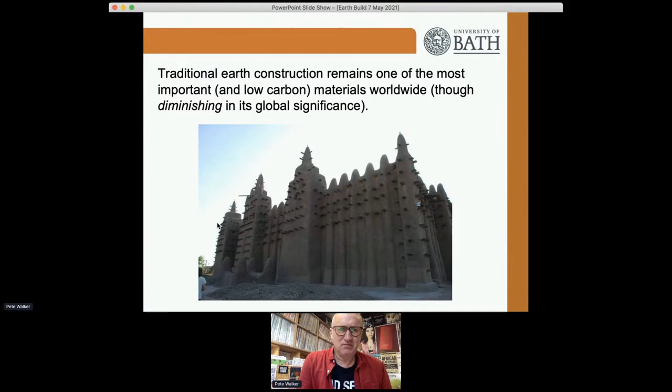So just to state some of the global problem, and I'm sure many of you know this, the built environment is the largest contributor to our global carbon emissions. The way we build buildings and the wider environment, and the way we use buildings, contributes to, in many industrialized countries, around 40% of our total energy use.

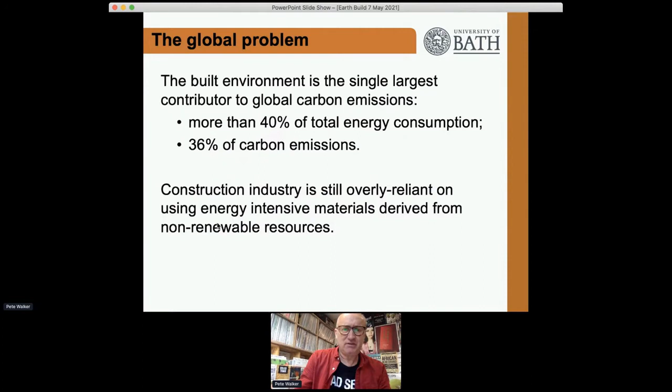And similarly, depending on how we generate the electricity and other energy, around 36% of our CO2 or greenhouse gas emissions. And still we rely on a construction industry that's over-reliant on highly energy-intensive, cheap fossil fuel energy materials derived from non-renewable resources.

And just to talk about materials use, the construction industry globally consumes around 40% of all raw materials that we excavate, grow and harvest from the earth, which is about 3 billion tons of materials a year. And the manufacture of materials we use to build our infrastructure accounts for around 11% of all greenhouse gas emissions.

Some statistics specific to the UK, where I'm speaking from: around 120 million tons of waste is produced as well. So not only does the construction industry use a great deal of resources, it also produces a lot of waste in the process.

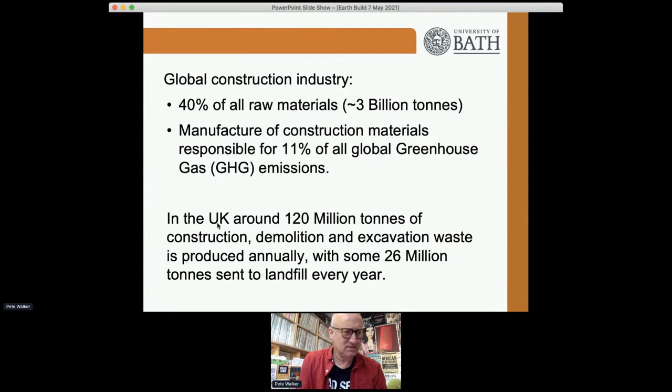Just for context, the second most consumed material on the planet after water consumed by humans is concrete - we consume a huge amount of that material. And the production of cement that goes into concrete is a large contributor to CO2 emissions.

We talk more recently about needing to decarbonize our economy, and there are international agreements to decarbonize economies and get them to net zero carbon by 2050. If we're going to do that, then in the construction industry as well as elsewhere, we need to improve our manufacturing and improve the functionality of our buildings.

Both new build and our great enormous stock of existing buildings. This revolves around improving energy efficiency and operation of buildings, using lower carbon materials, and also greater circularity in our processing - designing not for cradle to grave, but for cradle to cradle, with a view to how we use materials and products after the end of life of a building.

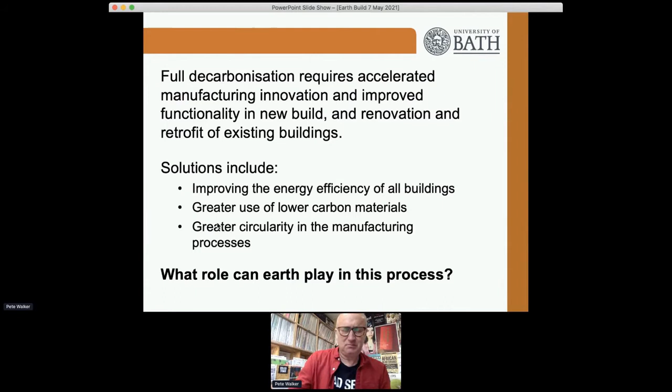So what role can earth building materials play in this process? I've been working on earth construction for around 30 years now, and over that period I've seen a variety of innovations in earth construction.

First of all, in terms of a greater array of products - manufactured products such as plaster products and building boards, and even pre-mixed, pre-bagged rammed earth, as well as a variety of unfired masonry units, as shown in the figure.

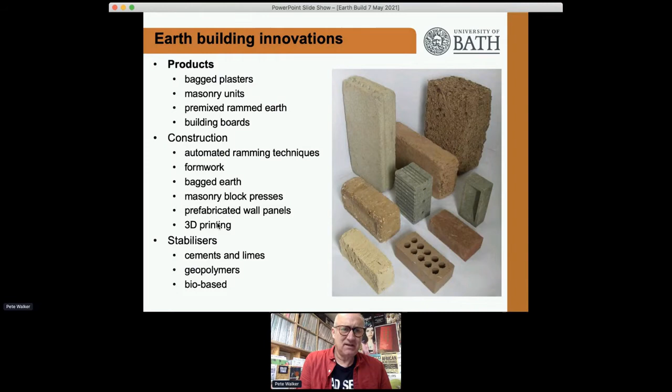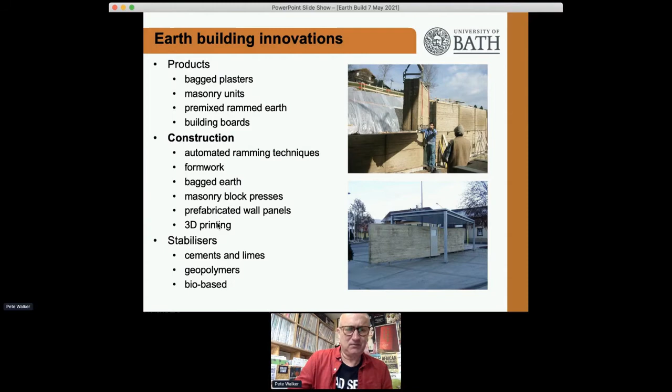And then in construction processes with earth, we've seen prefabricated wall panels, as the examples in the photographs show, both from Martin Rauch, and also automated ramming processes, innovative formwork, bagged earth, and different presses to make masonry blocks. Most recently, 3D printing has been used to produce earthen buildings, and very recently there was a release about a building in northern Italy, which looks quite stunning.

And of course, a contentious issue at the bottom here is a recognition that for many people around the world, earth construction means stabilized earth construction. We can talk about this till the cows come home and beyond. But there has been a lot of work done on looking at how to improve some aspects of the performance of earth building. Indeed, some of the natural processes we use in earth, whether it's compaction or mixing with natural materials such as cow dung, is a form of stabilization as well.

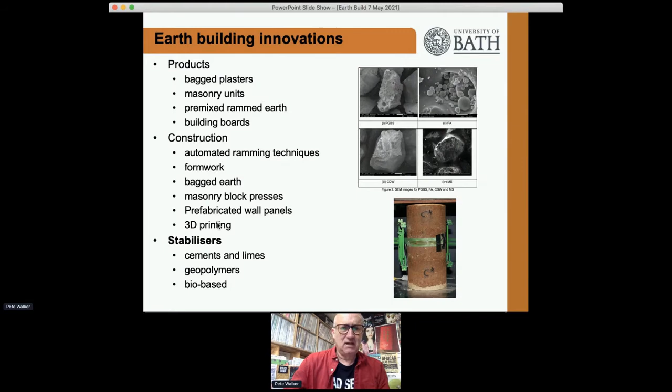In recent years, we've seen a lot of research effort and innovation by industry, and knowledge generated to understand truly the performance of earth building and the benefits it brings. One of the speakers earlier mentioned the amount of research done on earth construction. I can probably confidently say there are more people with PhDs in rammed earth construction in the UK than there are people actually making a living out of building with rammed earth.

So we have a better understanding of hygrothermal performance of earth construction, and the positive contributions earth makes to comfort and indoor air quality and indoor environmental quality of our buildings. A better understanding of mechanical performance and structural design of earth buildings, a better understanding of durability, and linking to that, how we can best repair and conserve existing buildings.

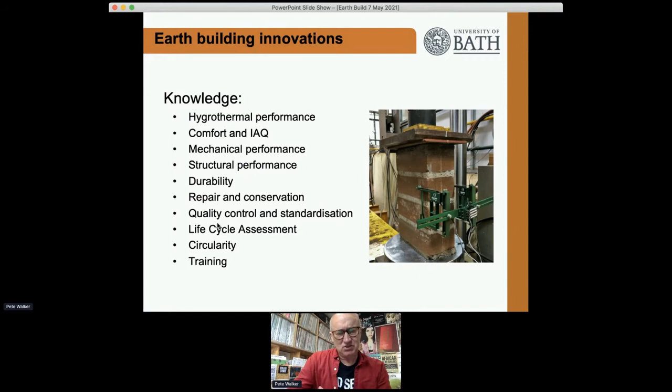This has fed into standardization, as mentioned with the New Zealand standards, and increasingly many countries around the world now have standards for earthen buildings developed over the last 20 or so years. There's also a better understanding of the environmental impacts of earth building, linking through to how we can develop that into circularity, circular construction, which has also fed into training.

In terms of understanding what earth can do to improve the impacts construction and buildings have upon climate change, it has to be done through being informed. One way, and the best way to inform that impact, is through something called life cycle assessment, through understanding the various environmental impacts that processes, materials and products can have. Then we need to use informed decision making.

We'll hear from the next speaker about environmental product declarations, EPDs, which is a particular take on life cycle assessment. Sometimes, because the impacts of a process or product can be multifaceted, often in terms of reducing greenhouse gas emissions, it can come down to the concept of just looking at embodied carbon dioxide equivalent—the amount of CO2 emitted to the atmosphere as a result of construction and product manufacture through whatever defined period, whether cradle to gate, cradle to grave, or cradle to cradle.

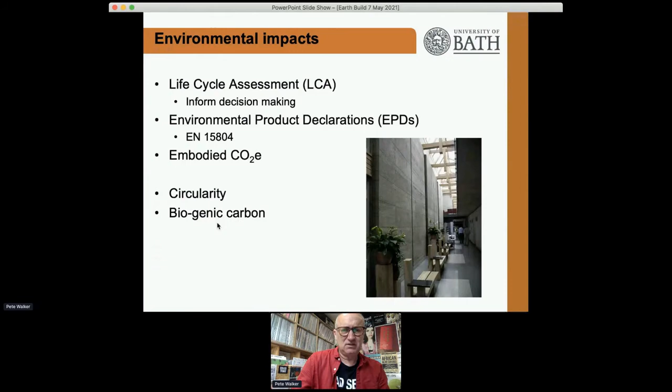And again, mentioning the aspect of circularity, more increasingly the construction industry is now aware of the positives of biogenic carbon, i.e. that plant-based materials through photosynthesis can take atmospheric carbon dioxide and turn it into cellulose, hemicellulose, and lignin, which remains stored within that plant material, whether trees, crops, or other plant-based materials. Historically and in modern construction, earth and plant-based materials are often used together.

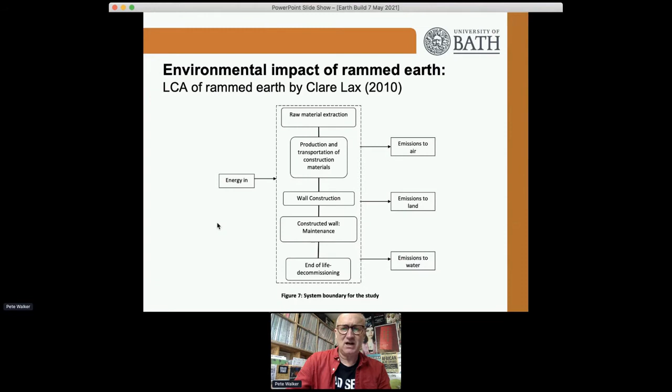Touching upon some research done previously—this is from 11 years ago now—done by a student of mine, Clare, working with Roland, who looked at the life cycle assessment of rammed earth. The diagram looks at the system boundaries, looking at the impacts of raw material extraction, transportation, construction, maintenance, and end of life. So it wasn't particularly looking at it from a circularity point of view.

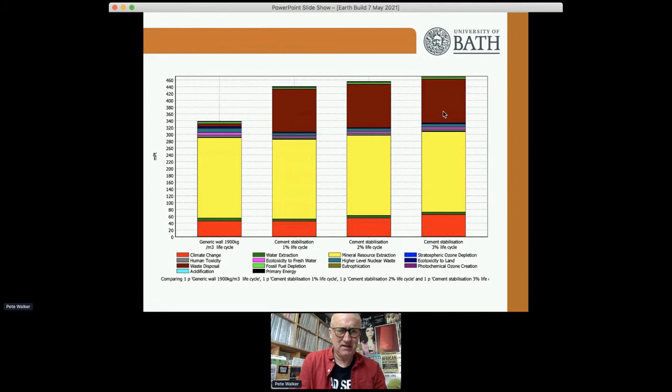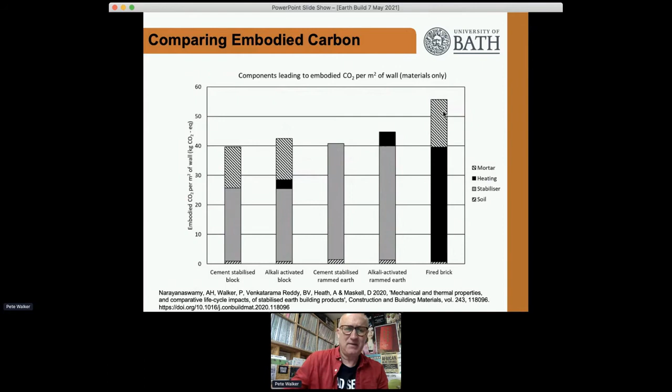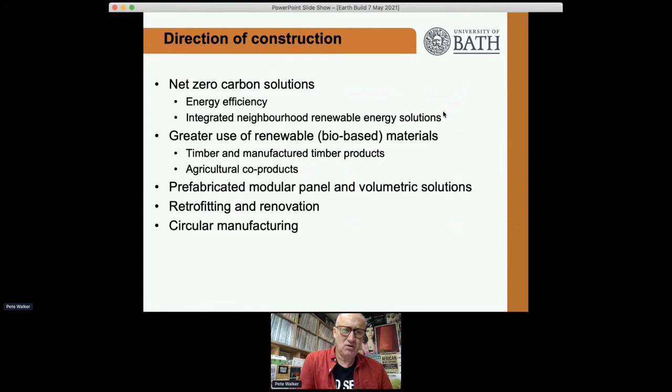There's a pressing need to preserve and prolong the stock of our existing buildings and improve their performance. There's also increasing recognition, certainly in Europe and North America, of urban construction - we've seen talk of building very large skyscrapers out of engineered timber, sometimes referred to as 'ply scrapers.'

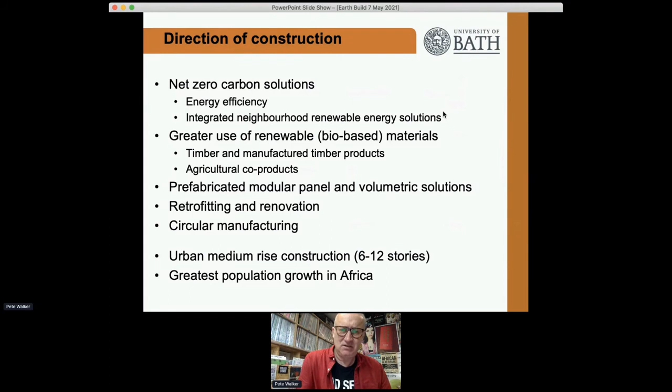I think there's recognition that the most efficient way for urban areas to develop is probably in medium-rise construction. As you build larger and larger structures, you need to put more and more material in to support the higher stories. So the optimum size of a building is in the 6 to 12 story range, to minimize embodied carbon while maximizing usable floor space.

Over the next 80 years or so, the world will see the greatest population growth in Africa. For the rest of the world, population growth is going to increase by around 2%, whereas population growth in Africa is estimated to grow by over 200%, from something like 1.3 billion citizens up to over 4 billion citizens.

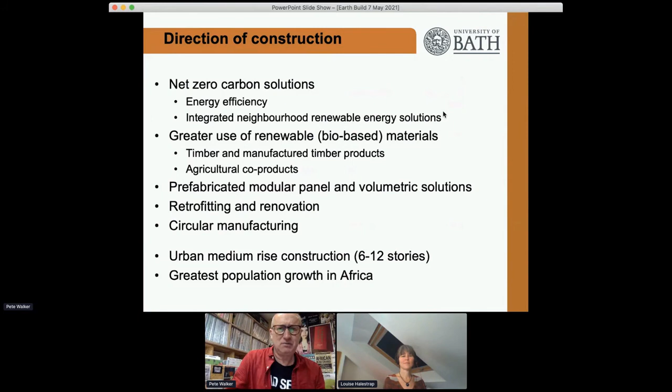So if we're looking at where earth construction can make its greatest impact, then perhaps that's where it can indeed make a great contribution. Now, opportunities for earth building - I'm going to be cognizant of the time.

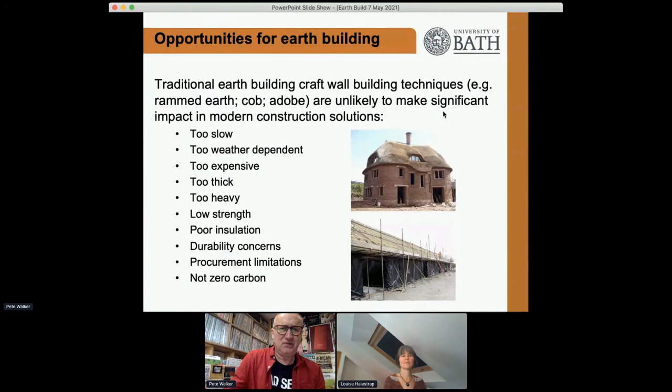I think traditional earth building techniques such as cob, rammed earth and so on are still relevant and have a place for sure. But in terms of the wider construction market, there are many challenges to their use as listed there. So we need to find ways to best use earth incorporated within a construction industry that is increasingly moving towards prefabrication and timber construction.

As a personal viewpoint, I think the opportunities lie in finishing materials - in plasters, in plasterboards, in insulation products - and using earth for thermal massing and hygrothermal regulation.

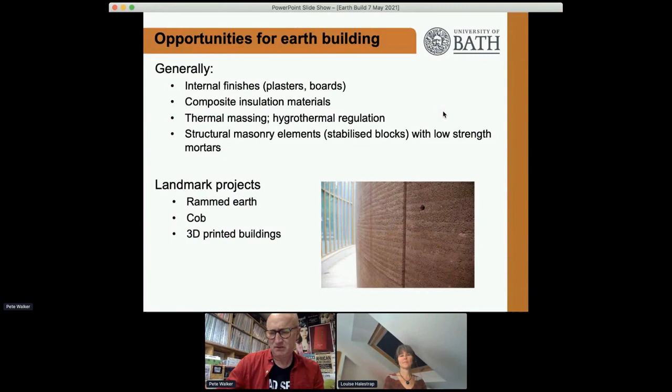In terms of the circular economy, I think there's a significant opportunity to use earth block masonry, including stabilized blocks, which would allow materials to be reused at the end of construction. There will also continue to be important projects using traditional and innovative techniques like 3D printing. But in terms of mass market, I feel it lies with the points just mentioned.

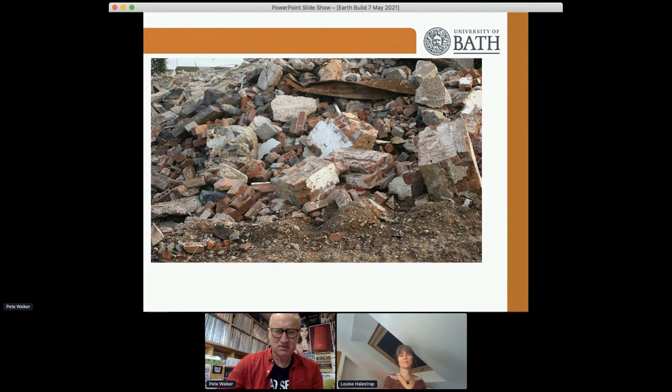This is a photograph of a demolished brick building, which has lumps of steel in it as well. I've included it because of the contrast between using very high strength mortars versus the potential for recycling as part of a circular approach - here, Victorian 19th century masonry units were laid with a very low strength lime mortar. So using a similar approach with earth bricks and earthen mortars, we can recycle the units as part of a circular solution.

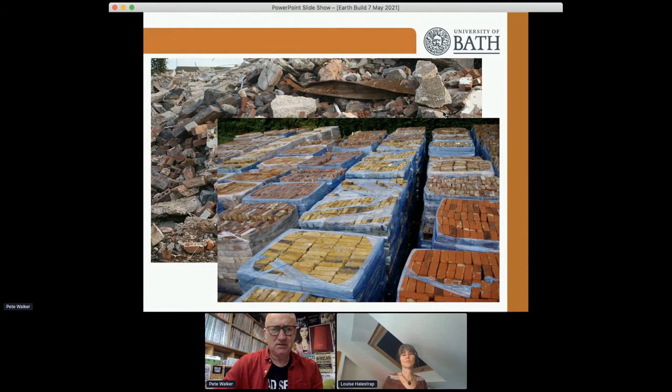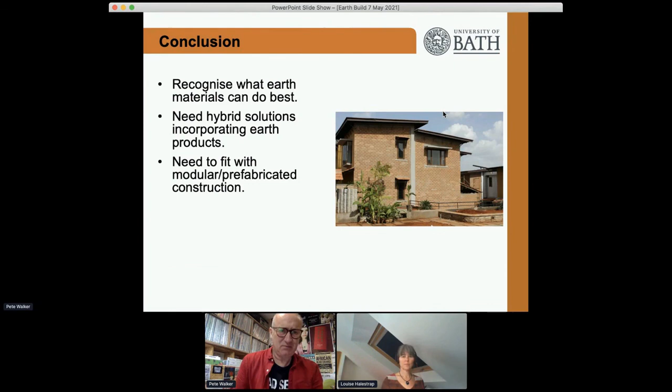To conclude, we need to recognize what earth materials can do best in the wider construction industry to have the greatest impact. We need to look at hybrid solutions which incorporate earth products, not necessarily delivering everything solely in earth, and we need to see how best we can fit in with the trends towards prefabricated construction.

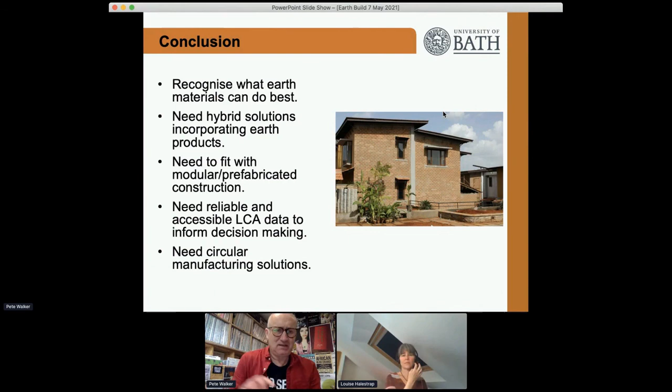Everything should be informed by a life cycle assessment to guide decision making if we are seeking to minimize our environmental impact. And finally, we do need greater circularity in our approaches. So that's my last slide - thank you very much.